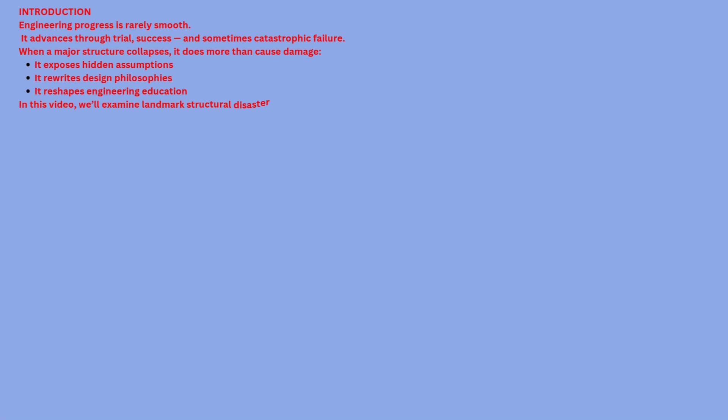Introduction. Engineering progress is rarely smooth. It advances through trial, success, and sometimes catastrophic failure. When a major structure collapses, it does more than cause damage. It exposes hidden assumptions, it rewrites design philosophies, it reshapes engineering education. In this video, we'll examine landmark structural disasters and the permanent changes they triggered in the engineering world.

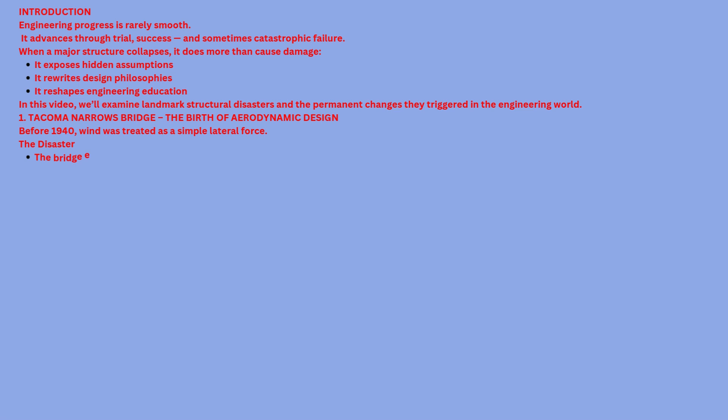1. Tacoma Narrows Bridge. The birth of aerodynamic design. Before 1940, wind was treated as a simple lateral force. The disaster. The bridge entered violent torsional oscillations. Aeroelastic flutter caused total collapse. Wind speeds were not extreme.

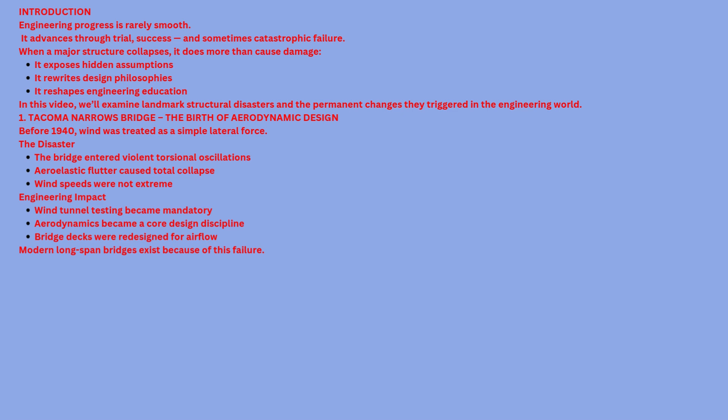Engineering impact. Wind tunnel testing became mandatory. Aerodynamics became a core design discipline. Bridge decks were redesigned for airflow. Modern long-span bridges exist because of this failure.

2. Ronan Point. The age of progressive collapse design. A small gas explosion led to a massive partial collapse. The disaster. Weak panel connections, no redundancy. Local failure caused global collapse.

Engineering impact. Introduction of robustness requirements. Progressive collapse checks in design codes. Stronger connection detailing. This disaster changed how engineers think about structural continuity.

3. Hyatt Regency Walkway. Connections matter. One of the deadliest structural failures in history occurred during normal use. The disaster. Design change, doubled connection loads, inadequate review process. Walkways collapsed suddenly.

Engineering impact. Mandatory design change reviews, increased focus on connection design. Ethical responsibility emphasized in engineering education. This failure redefined professional accountability.

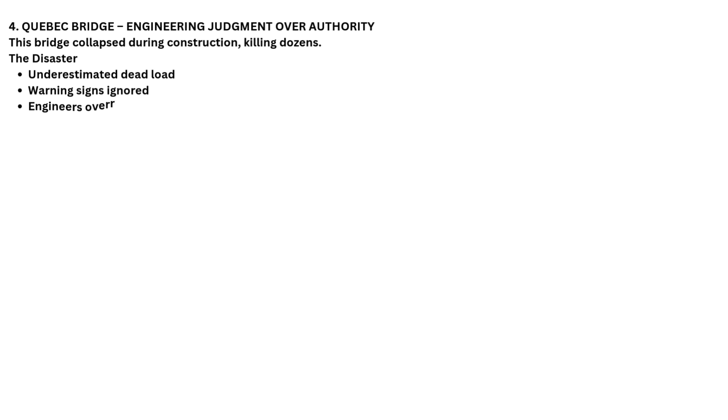4. Quebec Bridge. Engineering judgment over authority. This bridge collapsed during construction, killing dozens. The disaster. Underestimated dead load, ignored warning signs, engineers overruled by management pressure.

Engineering impact. Importance of independent design checks. Engineers empowered to halt construction. Ethics placed above deadlines. Engineering judgment gained legal and moral authority.

5. Sleipner A platform. The limits of computer models. A cutting-edge offshore structure failed during testing. The disaster. Finite element model underestimated stresses. Thin concrete walls failed explosively.

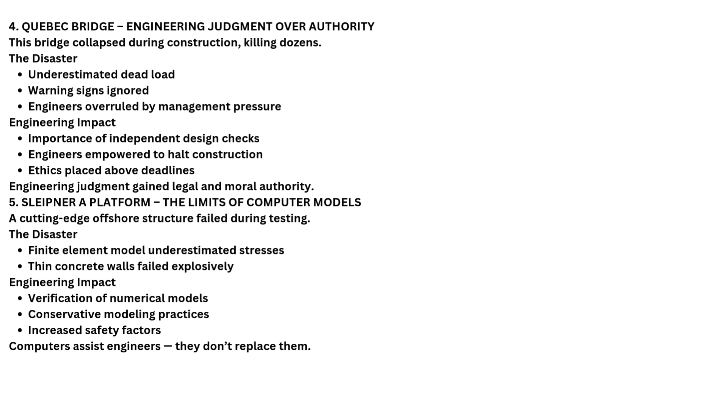Engineering impact. Verification of numerical models. Conservative modeling practices, increased safety factors. Computers assist engineers, they don't replace them.

6. Champlain Towers South. Durability is structural design. A residential tower collapsed decades after construction. The disaster. Long-term corrosion, waterproofing failure, delayed maintenance.

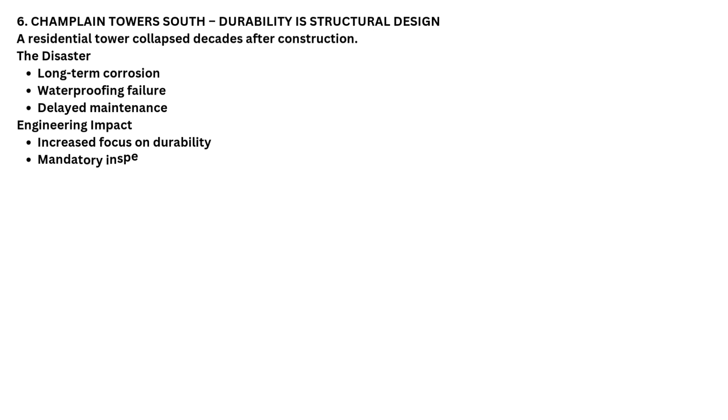Engineering impact. Increased focus on durability. Mandatory inspections for aging buildings. Life cycle design philosophy. Structures must survive time, not just loads.

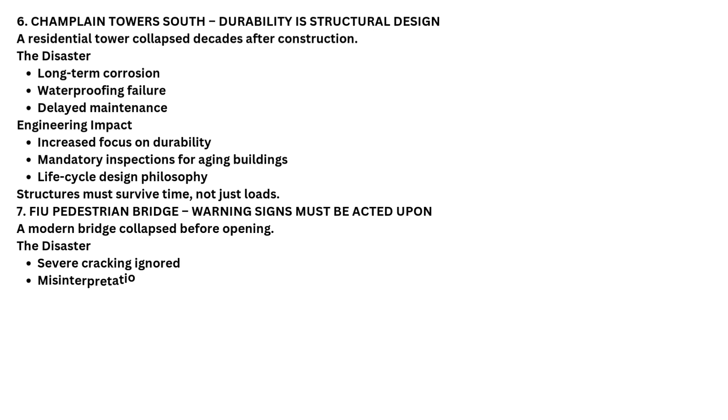7. FIU Pedestrian Bridge. Warning signs must be acted upon. A modern bridge collapsed before opening. The disaster. Severe cracking ignored, misinterpretation of structural behavior. Failure under self-weight.

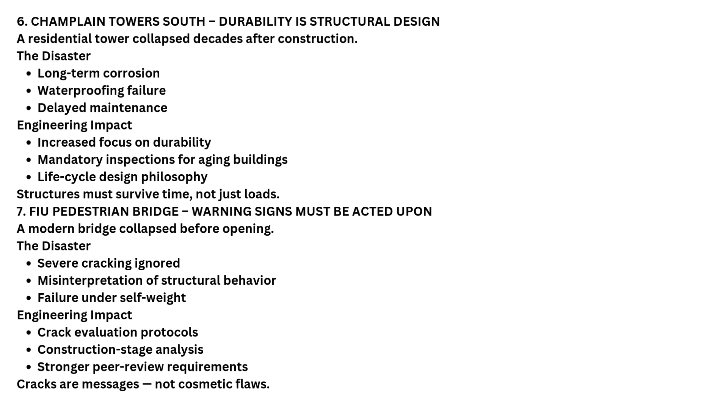Engineering impact. Crack evaluation protocols. Construction stage analysis. Stronger peer review requirements. Cracks are messages, not cosmetic flaws.

Why do disasters change engineering? Each disaster exposes blind spots, forces code revisions, changes design philosophy, improves public safety. Engineering evolves not because it wants to, but because it must.

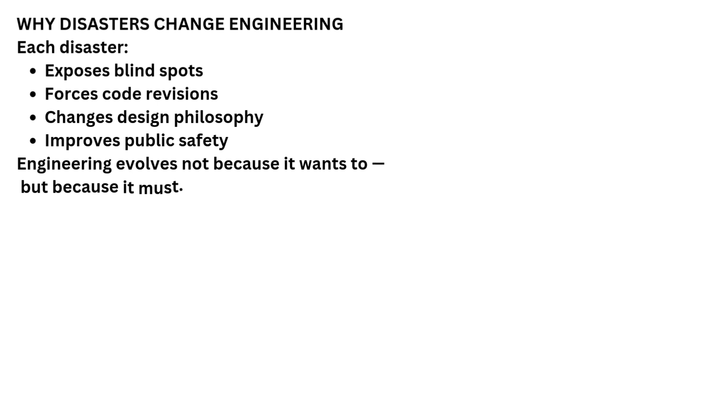Lessons for engineers and students. These failures teach us: safety margins exist for a reason. Ethics matter as much as equations. Assumptions are dangerous. Nature always has the final say. Studying failure is not pessimism. It's responsibility.

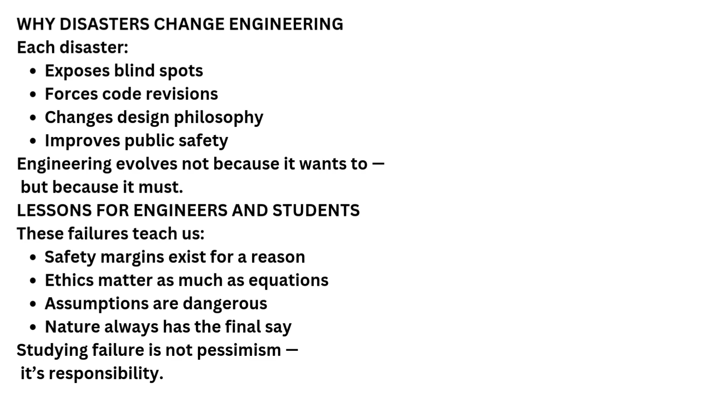Conclusion. The structures we design today stand on the lessons of yesterday's failures. Every disaster listed here saved countless future lives, made structures safer, made engineers wiser. Engineering is not defined by perfection, but by how deeply it learns from failure.